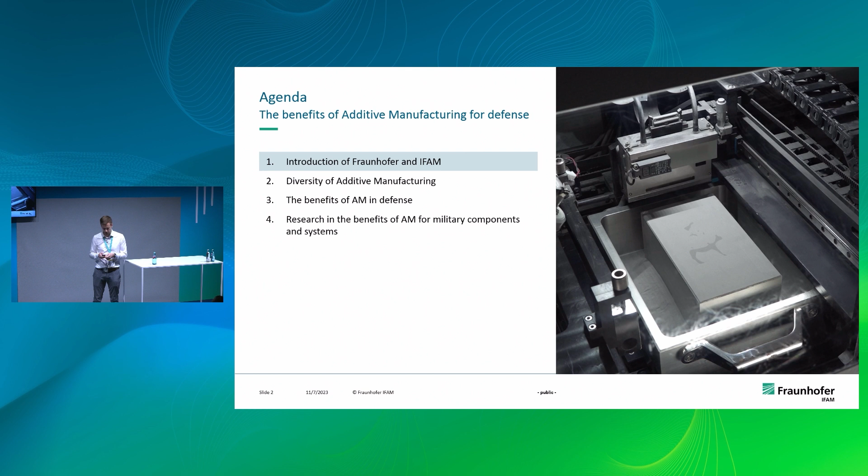Fraunhofer has about 30,000, more than 30,000 employees meanwhile. We have 76 institutes, most of them in Germany, as you can see from all the dots, very spread out. We cover basically anything you can research, from AI to manufacturing to biotechnology to whatever you need, Fraunhofer probably does it.

There's usually a joke that our institute is called IFAM, and of course this is a German shortcut. But when you just put an I and 2 or 3 letters in front of it, you have a Fraunhofer Institute. So there's IPT, IPK, IFAM, whatever letters you use, you'll find something at Fraunhofer.

We are funded one-third by the German government, because we're a non-profit organization dedicated to helping industry implement new technology into their production, for example, or into their digitalization systems. Two-thirds of our financing comes from third parties, so industry or public projects.

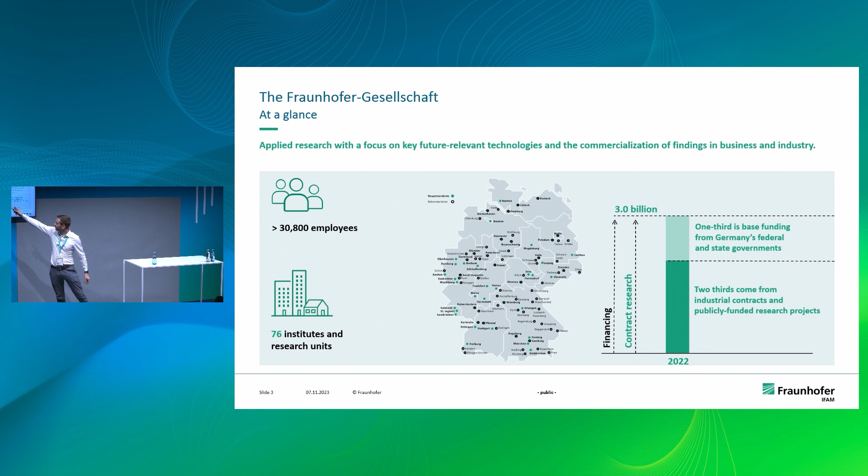One more thing, I come from Bremen, which is in the very north left, the green point, if you can see that.

What Fraunhofer has done so far, you can see here. The most known thing is probably the MP3 audio compression, which was developed by Fraunhofer, or together with Fraunhofer, and also the MPEG-4 video compression in the early 90s. Later in the 2000s, Fraunhofer developed the world record for the most powerful laser. And now, in the current times, we have quantum computers, hydrogen technologies, and AI assistants.

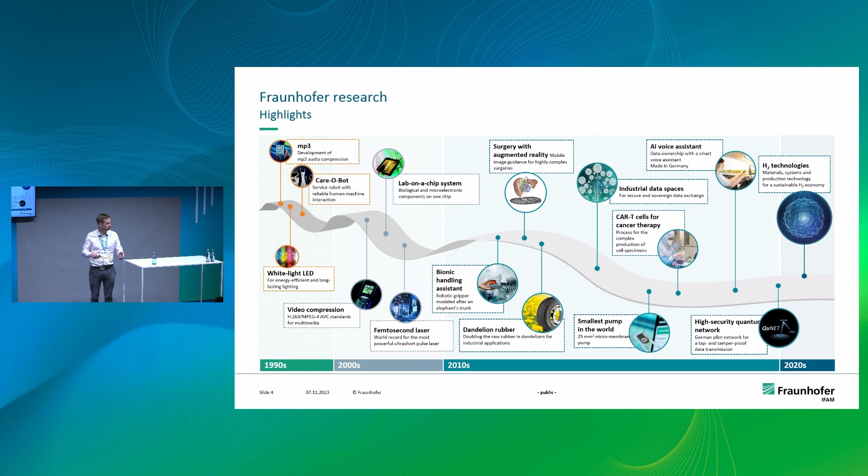Fraunhofer always tries to be on the edge of innovation, but of course we don't do it by ourselves. Some things we create ourselves, but in many cases a customer comes to us, for example Microfactory, and they are not our customers, just an example, and they have an idea but don't have the capacity, the machines, or the time to do it. That's our business case, basically.

So Fraunhofer in general is like a non-profit institute, but we are Fraunhofer IFAM, and we have these topics in our institute in Bremen. We are one of the biggest, with about 700 employees.

We have metallic materials, polymers, surface technology, adhesive bonding, automation and robotics, and shaping and component manufacturing, where I am situated, with 3D printing, and energy storage converters. These departments are not a coincidence, because as I'm printing parts, I also need to join those parts, which I could do with adhesive bonding. I need material science for metal and polymers, and I also need surface change, not always improvement. So I can go from one department to another to help me out if I have a question.

So our institute is very big because it needs to be. We have many people, and we work for basically any industry: mobility, aviation, energy, whatever.

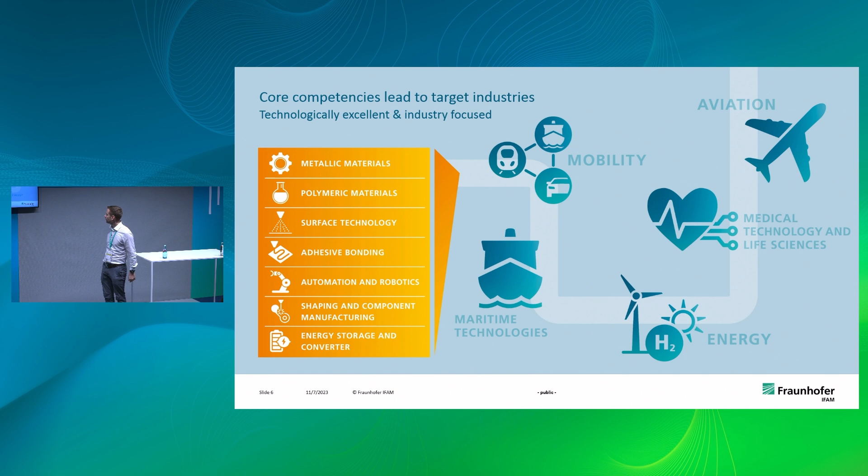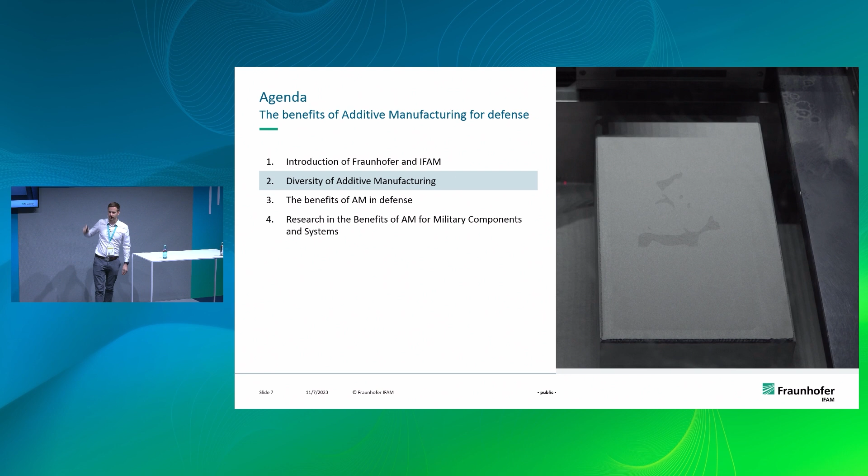Now I want to talk to you about the diversity of additive manufacturing. By the way, I forgot to mention in the second slide, this is our binder jetting machine, and it's printing the Bremen musicians. I'm not sure if you know them, but it's a nice fairy tale about Bremen if you want to read it.

This picture is from my colleagues at AM Power from Hamburg. Every year they publish a refreshed landscape of additive manufacturing. In this case, it's only for metal, the polymer system is even bigger, I think. All these technologies have probably their pros and cons.

Most of the companies are even here, you can look around. Fraunhofer IFAM covers 6 of these technologies, all of which we have in our place.

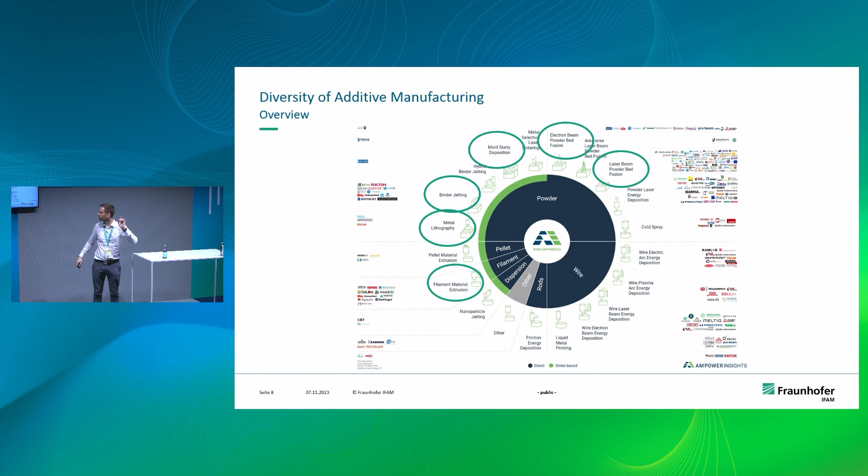Mainly, we have two points. One of them is beam-based additive manufacturing, what you know as laser beam melting or electron beam melting, that we cover. But what became even bigger is sinter-based additive manufacturing. So everything that is not melted, everything that produces a green part in the first place - binder jetting, metal jet like with Tritone, gel casting, 3D screen printing, things like that.

The difference is here. On the left, you can see the standard scheme for LPBF. It's pretty much the same - you have a laser, and a solid part ready, more or less. With sinter-based additive manufacturing, the printer only creates a green part, which has the strength of a cookie - maybe a bit stronger. So if you drop it, it's broken.

But both technologies have their pros and cons. Sinter-based additive manufacturing becomes very popular because the output rate is very high, although it's not very suitable for prototyping because you need a few iterations to get a good part. But finally, you can really print a lot of parts because you don't need support structures - you can nest the parts. It becomes very easy.

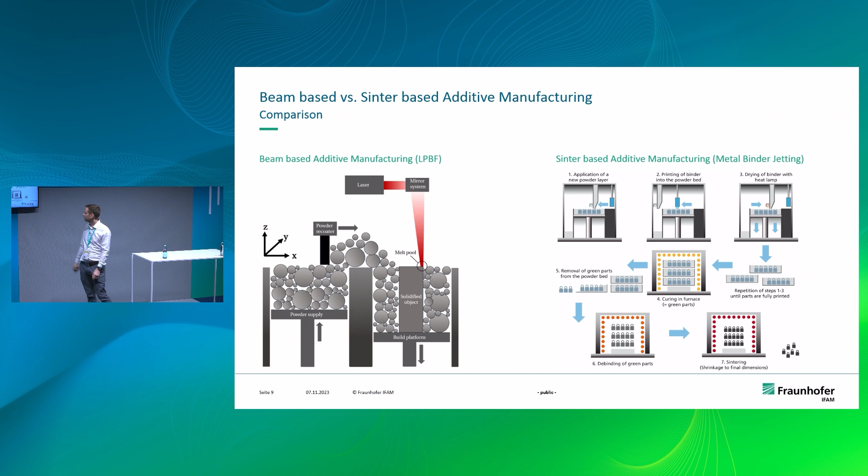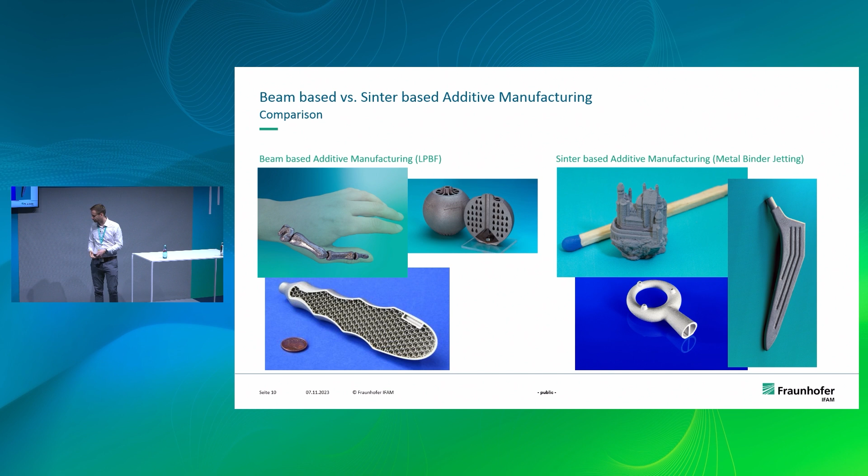There are a few pictures here. When I talk about pros and cons, for example, this one with sinter-based additive manufacturing would be very, very hard because of the too-complex internal structures. On the other hand, printing this part without supports is also very hard for LPBF. So you have your pros and cons with each technology, and that's why we have six of them in our portfolio.

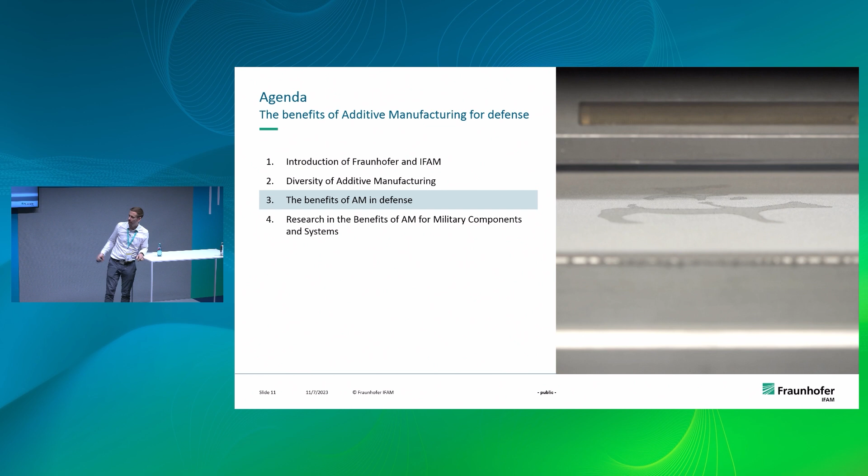All right, benefits of additive manufacturing. Generally it's pretty much the same as for many others. The first point is complexity - that's what everyone thinks is the advantage of 3D printing. But it's not really complexity, it's the fact that your designers don't have to focus on manufacturability when they design a part, and they want to.

A part has a function, and you can realize this function without limiting yourself to manufacturability. Of course 3D printing has its restrictions too, but much less. So you can design your parts as you wish, print it, and it can function very well without drawbacks. In the defense sector, you could easily print brackets, a very usual application, or structural parts to reduce weight and improve performance for aerospace, for example, but also just to improve parts in general.

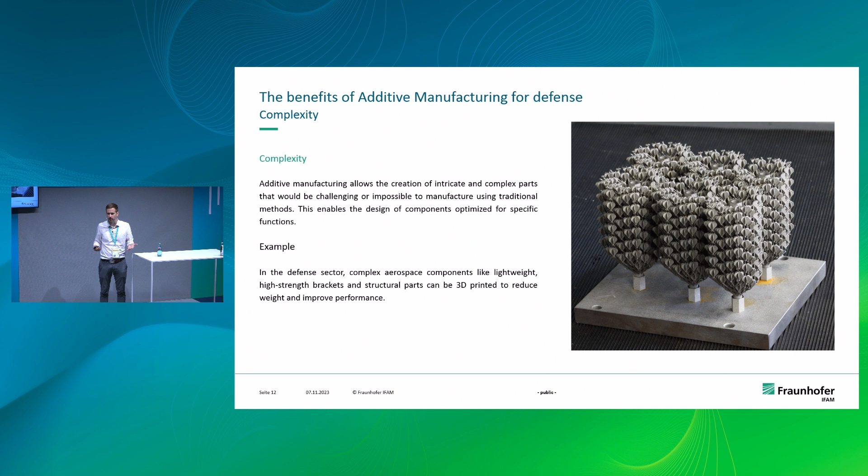Another thing we all come from is rapid prototyping itself. All the technology comes from there, but it's still a thing. When you develop a part, if you can see it, touch it, try it out - you wait maybe two days to have a part, show it to someone and ask questions about it - that's very useful for communication and development in general of those parts.

And of course you can also print functional parts that you actually test - if the load is okay for this part, then you can still cast it if you want, but you know it works with 3D printing without having any tools. Concerning the defense sector, you can prototype basically anything, from weapon components, armor design, to unmanned vehicles.

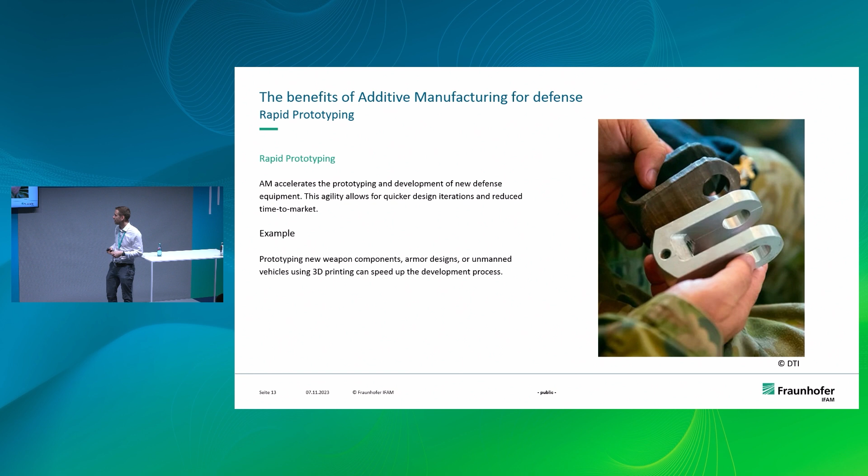In-field production - that's very specific for defense. This robot, this printer, I've seen somewhere - not this one exactly, but a pretty big concrete printer. Those things, not only the big printers but also very small ones, printing spare parts, printing individual things for your soldiers, your machines, your animals, whatever, can help you reduce storage and have things around that nobody has thought of before. Like you can have a storage, but the part you need isn't in there - you can print it.

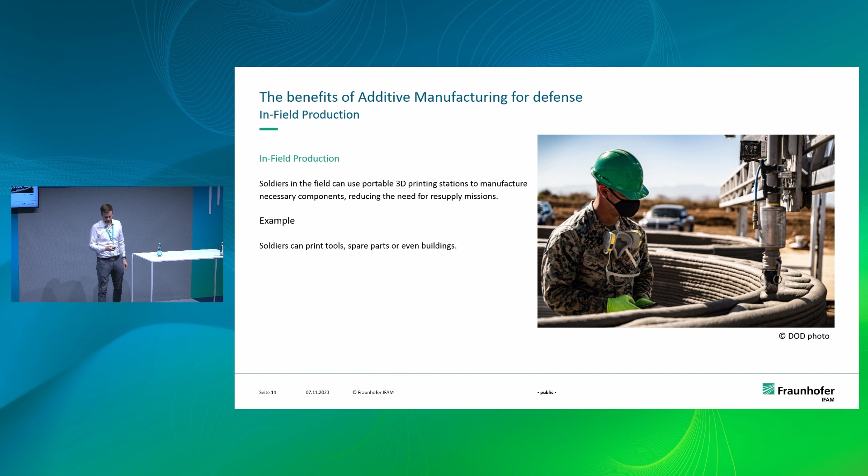And talking about parts not being there - supply chain resilience. If you can print your part, your supply chain, in case it breaks down, you have an emergency - you can print parts you need for that emergency. This covers especially spare parts, or for example remote areas, ships where you cannot have big storage or cannot supply very well. Take a 3D printer - there have been projects already where a 3D printer was in a container, or the whole process line was in a container, and they were quite promising.

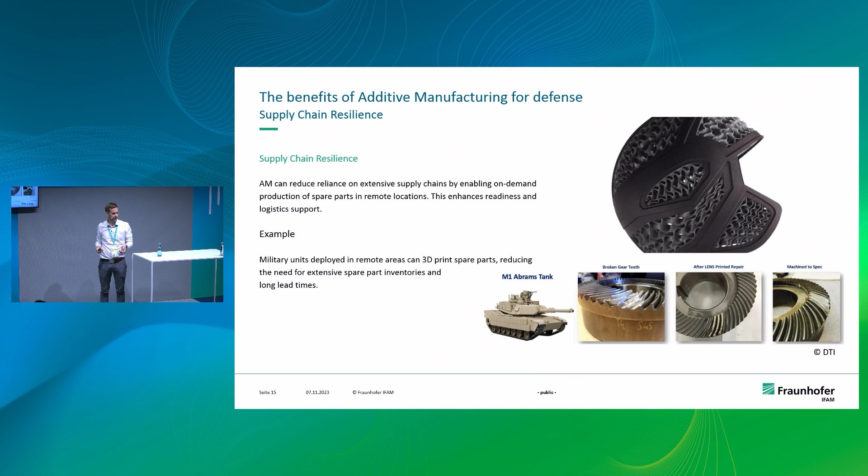The second last point is material selection. I'm always a bit indifferent about this one because additive manufacturing usually has fewer materials available than traditional manufacturing methods. But you can print materials that you cannot manufacture very well. For example, very hard materials are hard to mill. But sinter-based additive manufacturing doesn't really care, you can put a ton of carbon into your steel. Laser beam melting, for example, does care. So you have to take the right technology, of course, but you have the advantage here.

Basically, take the right technology and the right material, and you will be fine. This is an example, probably well known, from APWORKS. They printed this out of Scalmalloy, which is designed to be used in laser additive manufacturing because it only reaches its specific properties when you print it in laser beam melting.

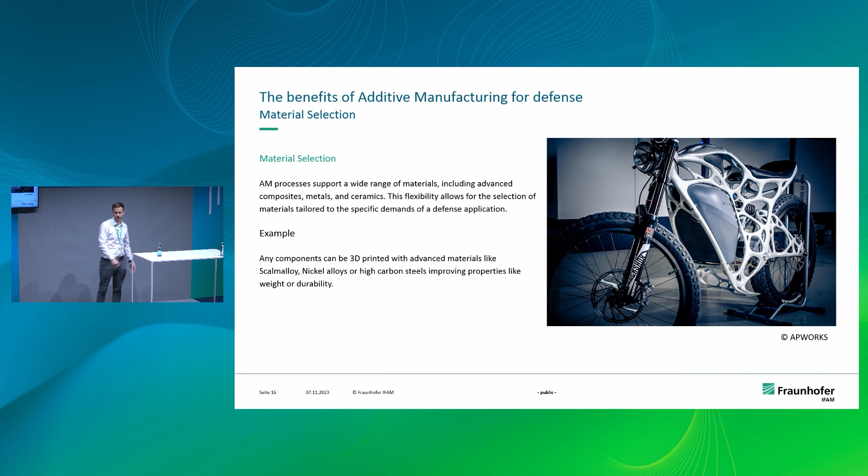Last but not least, customization. Customization is a thing which usually the fashion industry uses for luxury items, but also for shoes. But the army can also do this, tailoring helmets, tailoring any equipment you need, body armor, tailoring things to your machinery, and also change things very quickly when you don't have a part or it doesn't fit. Change it, reprint it, and you will be fine.

This picture is from General Lattice. They implemented this impact-lowering structure into their helmets.

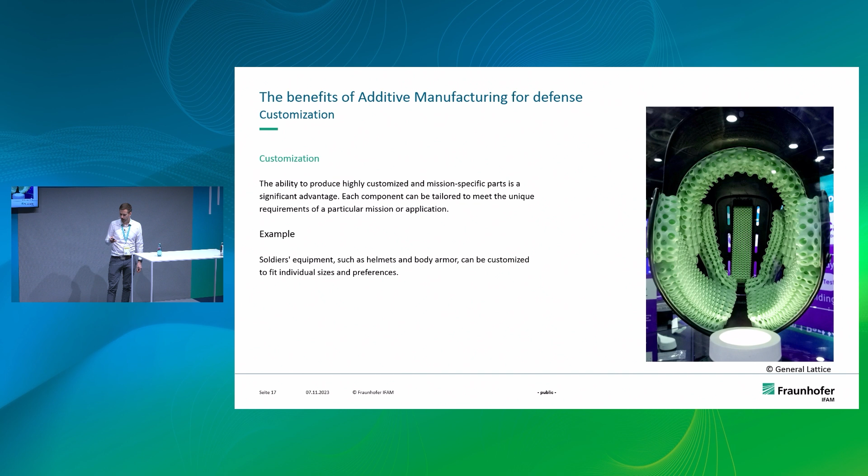One last thing I want to show you is the current research we do. The project is called ROLIAC. What we do there, it's from the European Defense Fund, and we want to demonstrate the benefits of additive manufacturing in general. We want to push this forward because we see the advantages, and we work within 3 different areas, first of all the design of lightweight and robust components, which can only or mainly be printed.

The novel materials for improved performance, especially in terms of bullet impact, for example. Robust and resilient supply chains combined with 3D printing, so that the 3D printers are extending the supply chain, not replacing it.

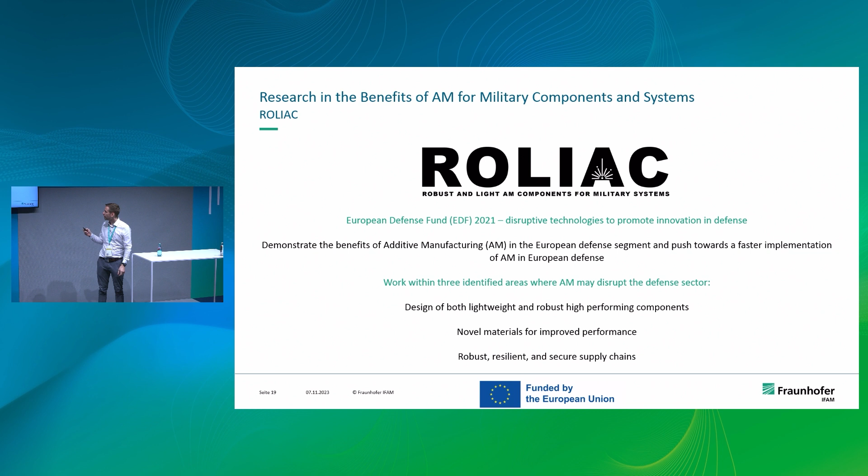We are a group of a few partners, and it's a 4 million project, and we have 3 different applications. One of them is this emergency wheel, which you can never have enough of if you are in a foreign, hostile maybe country. And we want to print them and design them as needed.

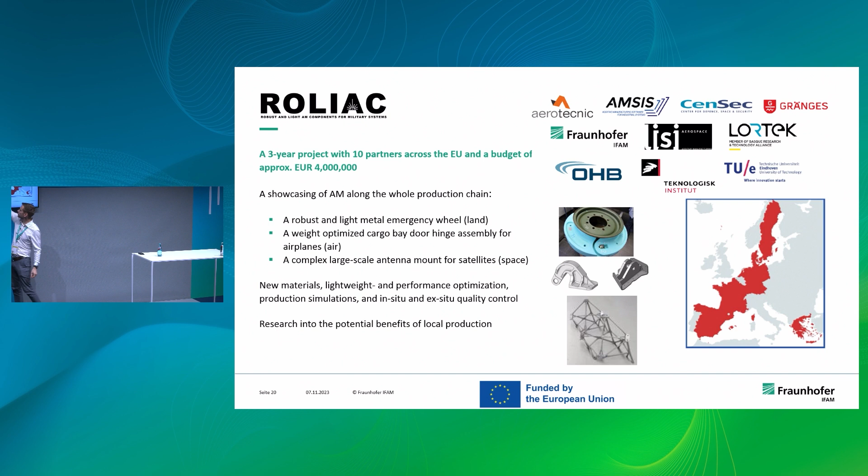This is a conventional part. This is not the printed one, but we want to redesign it so that it can be printed. The other thing is, for example, this door hinge. This is for aerospace.

where they always try to reduce weight, and they also try new materials. The last one is a space application, an antenna mount. This one already looks very additive, and I think it's already an additive part. They try to still get less weight out of this part.

With all of these 3 use cases, we check new materials, we check the design optimization, and we simulate the production. That's very important, because even when you want to have an emergency part, a spare part, I don't want to try 5 times to print it. I want a simulation and it should work.

We also have the in-situ and ex-situ quality control, which we do for these 3 use cases as well. All of these 3 use cases have different materials, so that the sum of our research has a big impact. Let's say that.

Last but not least, we have research into the potential of local production in general. As I said before, with this container concept, we're looking into that.